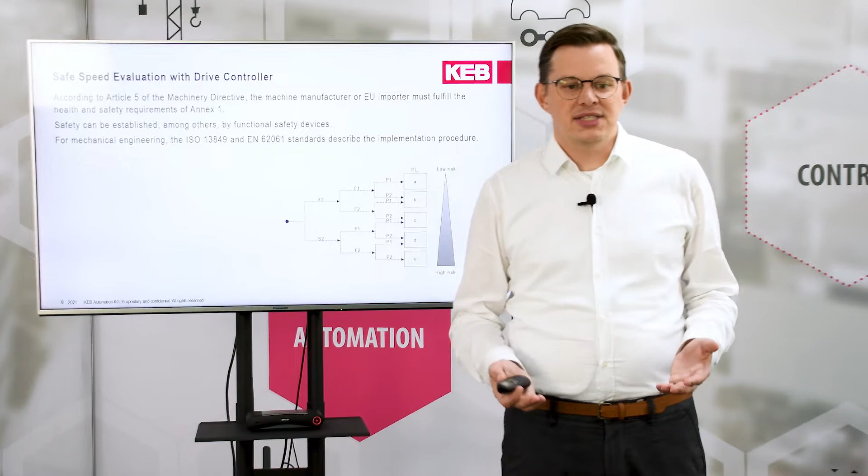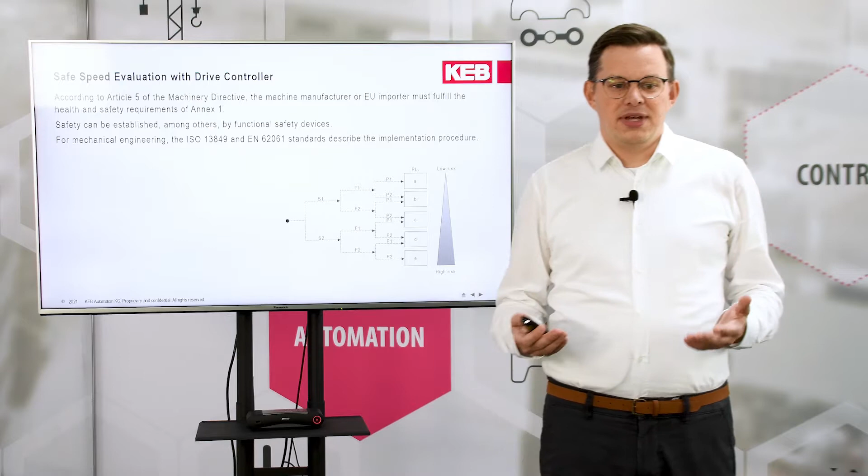First of all, I want to introduce you to why safe speed evaluation is so important to your machine. As you all know, according to Article 5 of the Machinery Directive, every machine manufacturer has to fulfill the health and safety requirements of this directive. And also, it's very important to integrate all the safety in an established way. And one of these established ways for sure is to use the internal safety functionalities, for example, of the KEB drive controllers.

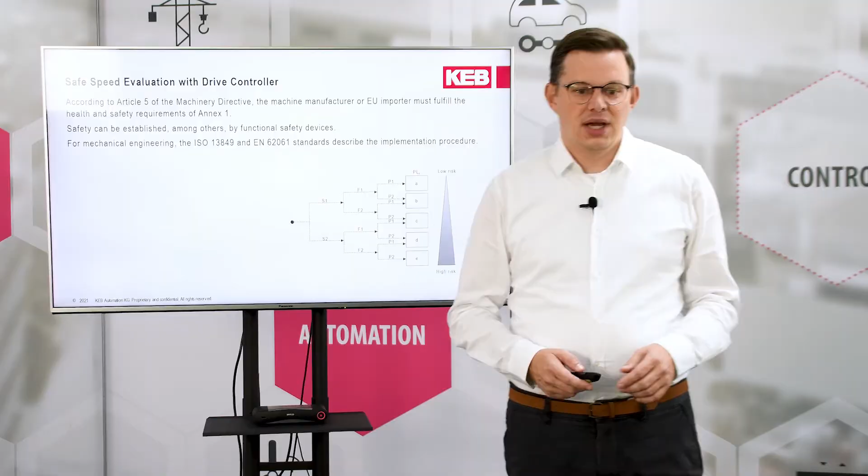Depending on your application, you have different modules in the machine regarding inverter, motors, additional input or output filters or chokes, and all these are different hardware positions according also to the IEC 61800-2. And if you want to fulfill the rules of safety inside of your machine, you actually need special hardware, for example, for speed or standstill monitoring. Also, this hardware means you have to wire some hardware. Sometimes you have to parameterize this special hardware by software and so on.

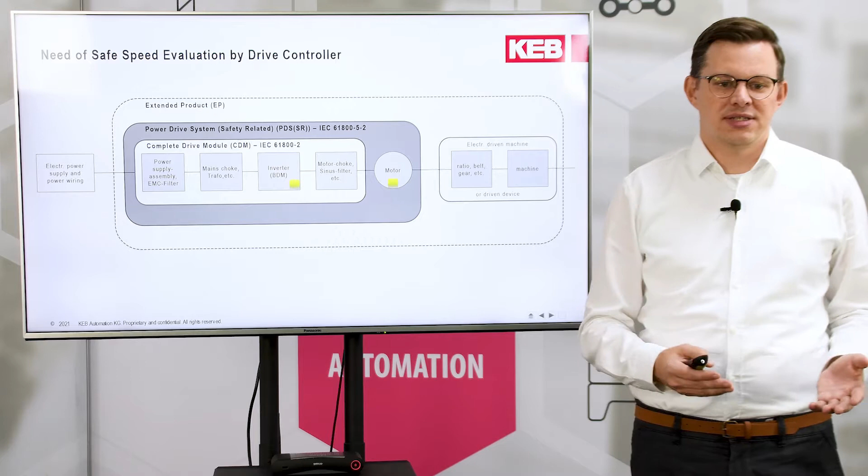If you want to bring down your costs, from our point of view, it's very sensible to integrate your components directly into the inverter or in the motor. This is, for example, a safety module that can be inside of an inverter, and also typically an encoder is used to detect the speed for speed or standstill monitoring directly in the machine. In a typical application you have an encoder just for the speed regulation or position regulation, and this means on the motor side there are mainly no changes to do to fulfill these rules, and just on the inverter side you need an inverter with a special safety certificate.

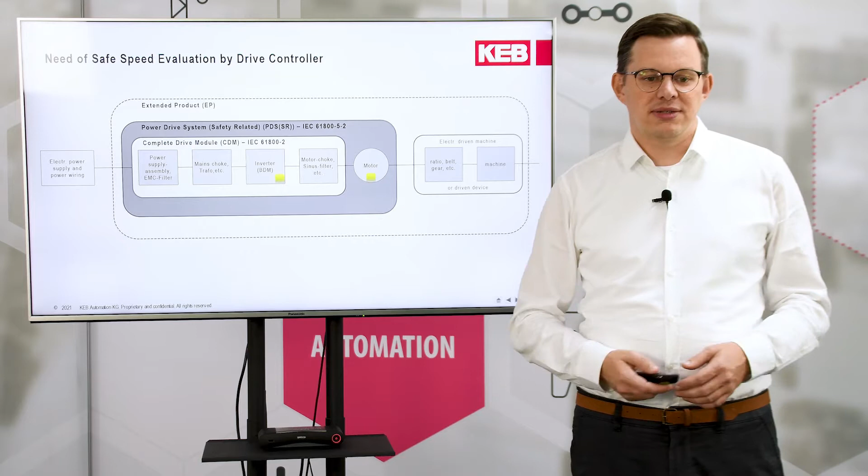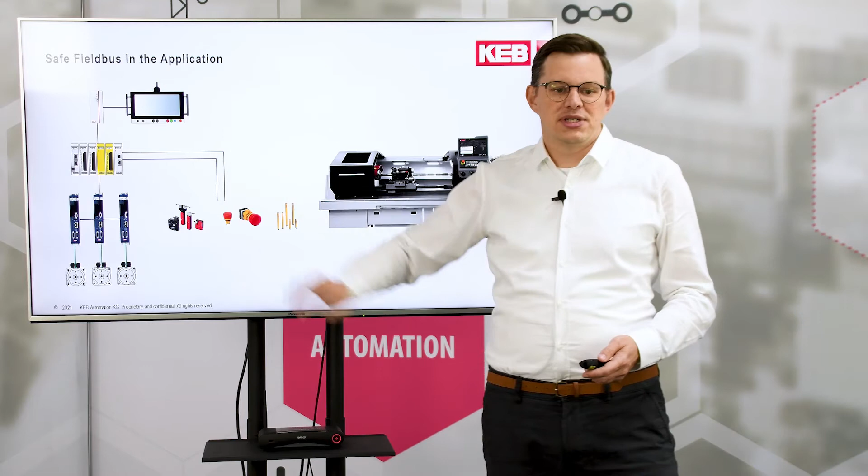Regarding safety, one of the big problems is the wiring in the application. Therefore, you can also use different solutions. For sure, you can directly mount everything in hardware, also the wiring, but this also means costs. In modern applications, you can also use the field bus, which is typically directly in your machine, so that you can use, for example, the EtherCAT bus plus FSoE, the safety over EtherCAT field bus, or in your Profinet applications, for example, the PROFIsafe field bus, to fulfill the safety rules and also to control the machine directly by field bus. The only thing you have to do is to add a safety PLC inside of your application with a module that can handle the safe field bus by itself. And this means that you can reduce the costs of the wiring because the field bus is already in your application.

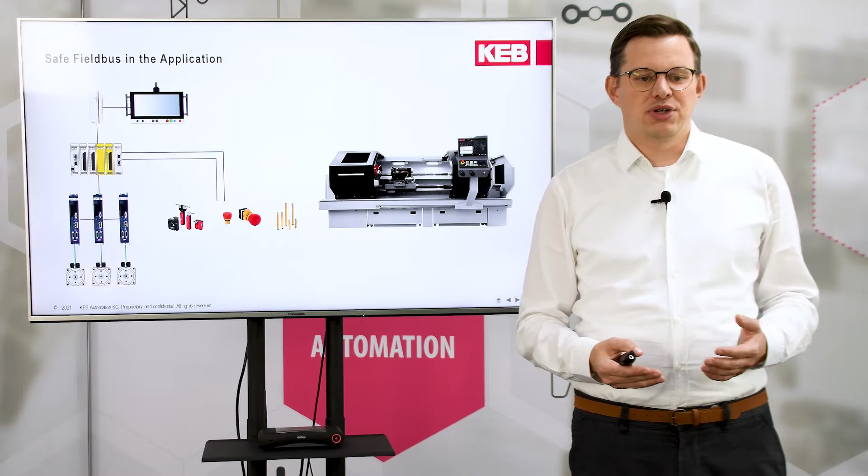If we have a look at the different technologies of speed evaluation, we have mainly three different types of evaluation. Very typical, for example, is analog speed monitoring, which means you have, for example, a sine-cosine encoder or a resolver in your application, which is typically known in the market. Also, if you have other encoders like digital ones, you can also use digital speed monitoring like Hiperface Safety or others, which means you have, in addition to the analog information, additional safety information, and you can also use this connection by safe field bus connection to get additional information.

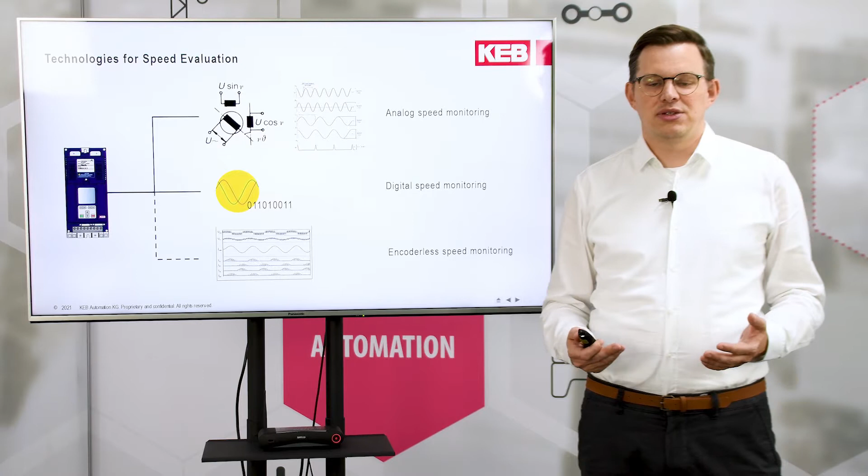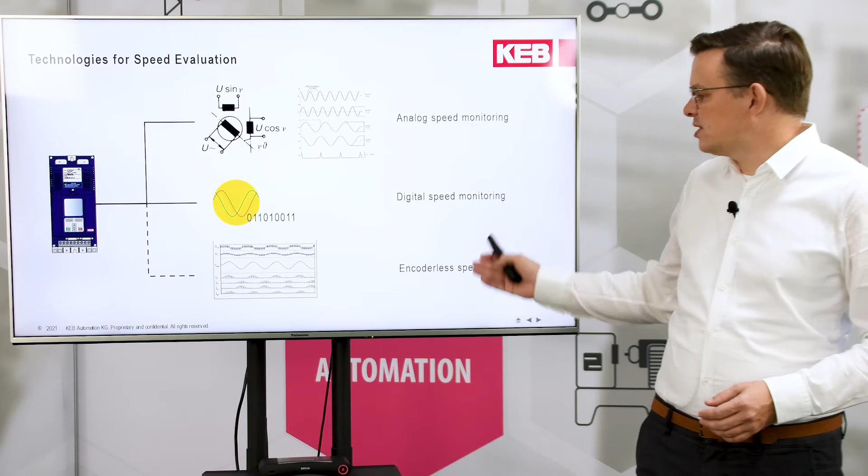And the third one, which we want to present to you today, is the encoderless speed monitoring, which means that you can use speed monitoring together with a KEB drive controller, but there's no need of any kind of resolver or encoder in your application anymore. And this means if the application does not need an encoder, there's also no need to use an encoder just to have safe speed evaluation. This is one of the big benefits here from KEB that we want to show you today.

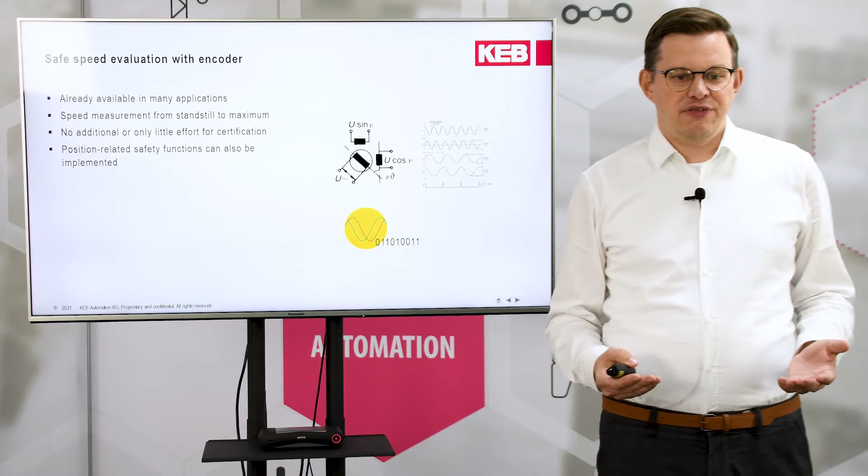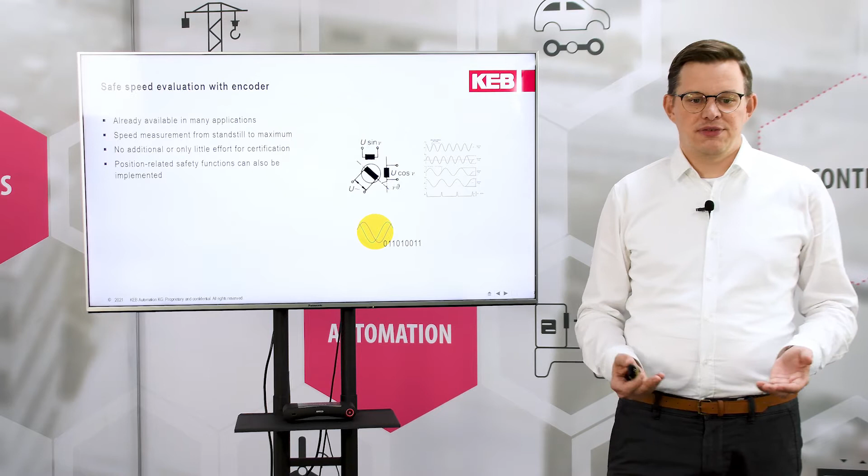Just to bring it here in front of you, I just added the typical main facts for safe speed evaluation with encoder. Like I said before, in many applications we still have an encoder, so it's just a question of certifying this application together with the encoder. Also, one of the big benefits is if you use an encoder, for sure you can also start from standstill to the maximum. Here are some limits for encoderless safety.

And there's typically no or just a little effort in certification if you have already an encoder in your application. Typically, the manufacturers of the motors can give you, for example, a certificate for the motor encoder combination, so that there is very limited effort in a startup of the machine or of the application to certify it.

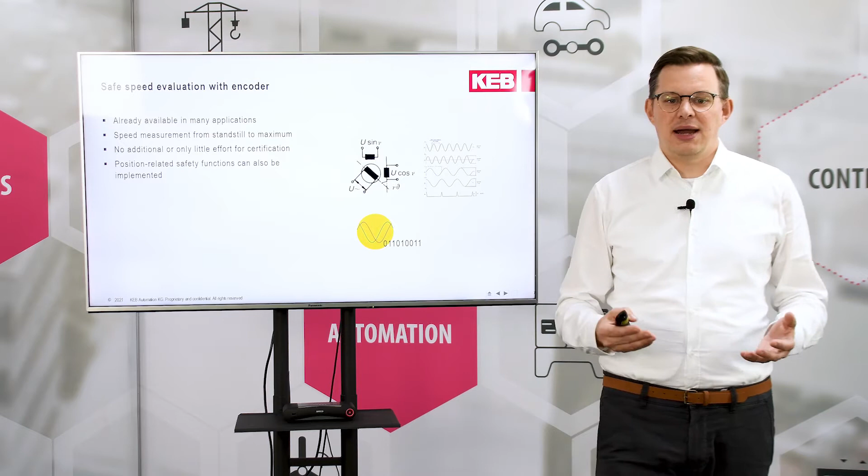Also, if you want to have position-related safety functionalities, you always have to use an encoder, because otherwise there is no clear information about the actual position, and so there is no other possibility up to now to handle this. Without an encoder, like I also said before, there's no need to use an encoder, which means less cost in the motor-encoder combination. For sure, you also need no encoder interface in your drive controller, which also means that you can reduce the costs of the inverter.

Also, if you have all this information directly in the inverter, the response times to figure out if there is a safety-related fault are much faster than the feedback from the encoder due to the less round trip time. Also, it's possible to evaluate high-speed applications using safe speed but without an encoder. And all this can also be certified up to SIL 2, which is a performance level D.

For sure, there are a lot of pros, but there are also two cons. Like I told you on the first slide, you cannot directly start at standstill, which means safe operating stop is not possible together with encoderless safety. And also encoderless safety is not possible in operations where you have regenerative operations. So in this field, the possibilities to calculate the speed are not given internally, and so these applications are also not possible.

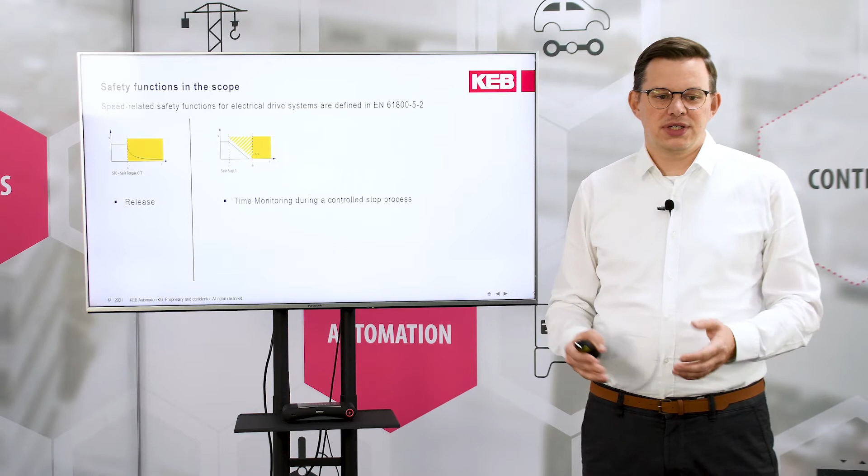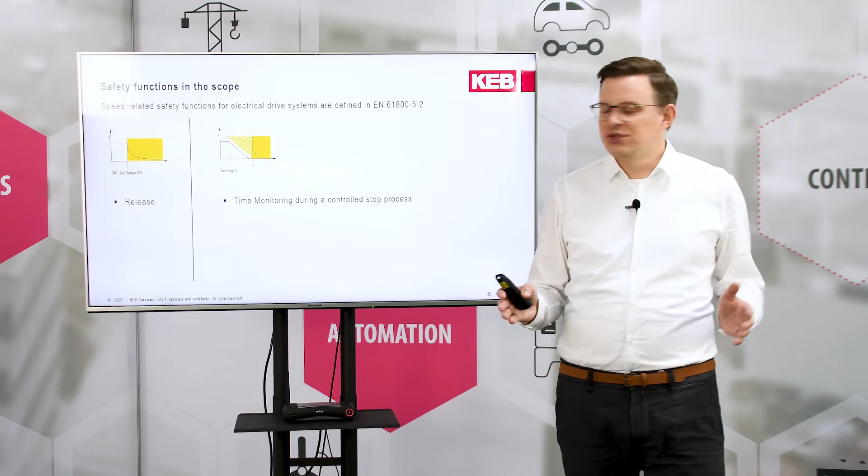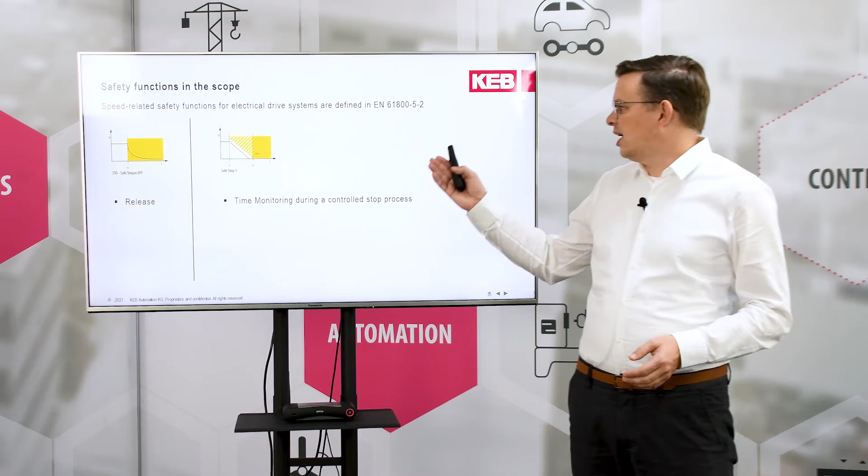So if we have a look on the safety functionalities here, for sure the first one we are always talking about is the safe torque off, STO, functionality, which is more or less the release function for the inverter to give torque to the motor shaft or not. And also combined with this, the SS1, which means safe stop 1, which is more or less a time monitoring during a controlled stop process. The inverter is lowering from the actual speed to 0, and after a time the STO will be given. And this is if you have a safety fault.

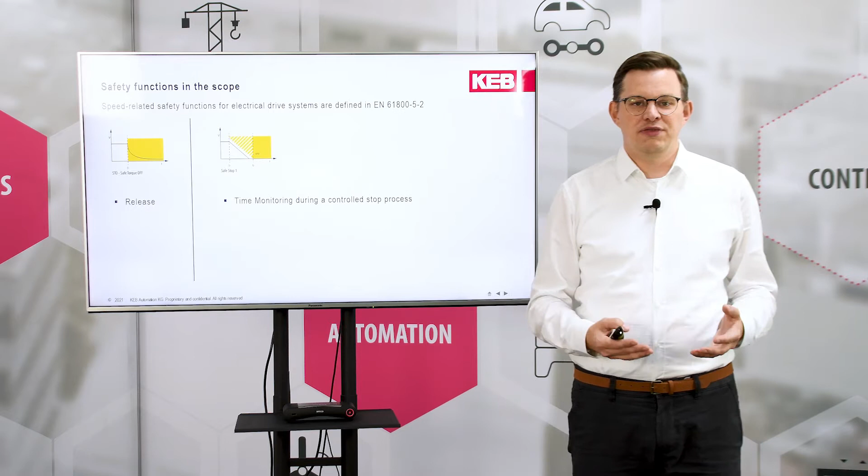The SS1 functionality is, besides the STO, the only safety function you can parameterize as a reaction to a safety fault. Otherwise, it's always STO. If we have a look on the safety-related functions, you can also see always on is the safe maximum speed. You can, for example, monitor maximum machine speed that you don't have to switch on or off. You always want to limit the application to, let's say, 220 RPM. So this is a functionality where you can give the 220 RPM directly to your application and there is no need to switch it on.

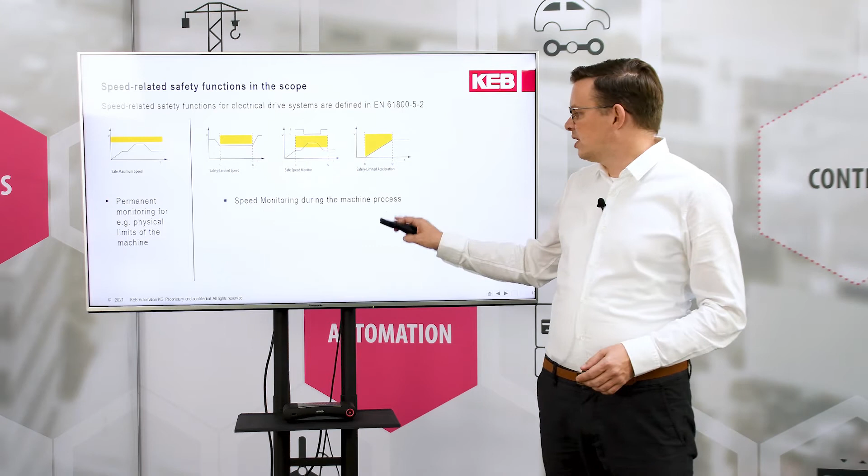Also, the other safety functions like SLS, safe limited speed, safe speed monitoring, or safely limited acceleration are also directly in the inverter and can be parameterized by our tools. So speed monitoring can be used during the machine process, not at standstill. If you want to start up an inverter, you can do this directly with the very well-known COMBIVIS 6 software from KEB, which is the software for the parameterization of the standard inverters and can also directly be used in this free version for the safety-related functionalities.

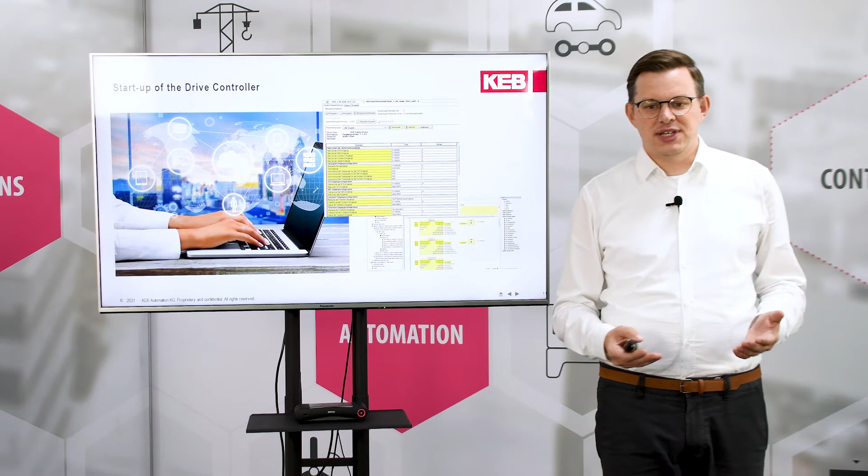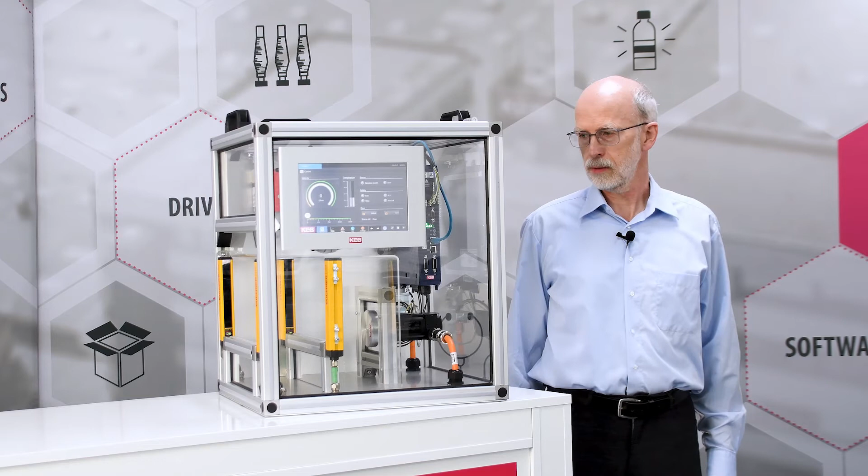And to give you an introduction of what is possible with this, we have here Bernd today to show us on our model some functionalities of the wide range of safe speed evaluation without an encoder. So welcome, Bernd. Yeah, welcome. My name is Bernd Tünnermann and I'm in the training department responsible for trainings in safety. I will show you how the drive functions with our demonstrator here.

This demonstrator consists of a COMBIVERT S6 Pro with a safety module 5. We have a synchronous motor without an encoder, and we have 2 light bars which directly switch safety functions. And we have a display here to manage some movement. So when we start, we can set a speed.

So start. The inverter runs, and with the first light bar, which we have directly connected to the input of the drive, we have safely limited speed, and with the second light bar we have safe torque off, the STO, so that the motor stands still.

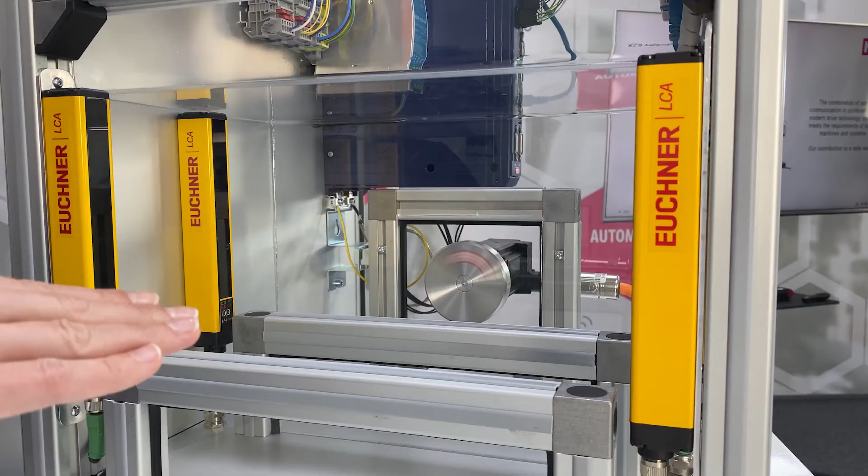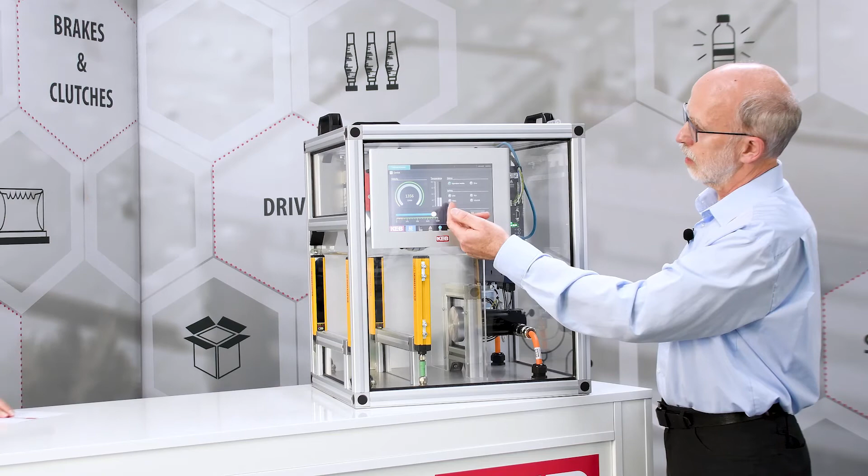Now we need a little help, so please activate the first light bar, and you see here that we are in status safely limited speed. 150 RPM is limited, and when you put your hand a little deeper, then you go to STO and the motor stands still. So when you put your hand out, you see we are going from disabling STO to disabling SLS, and the motor starts again.

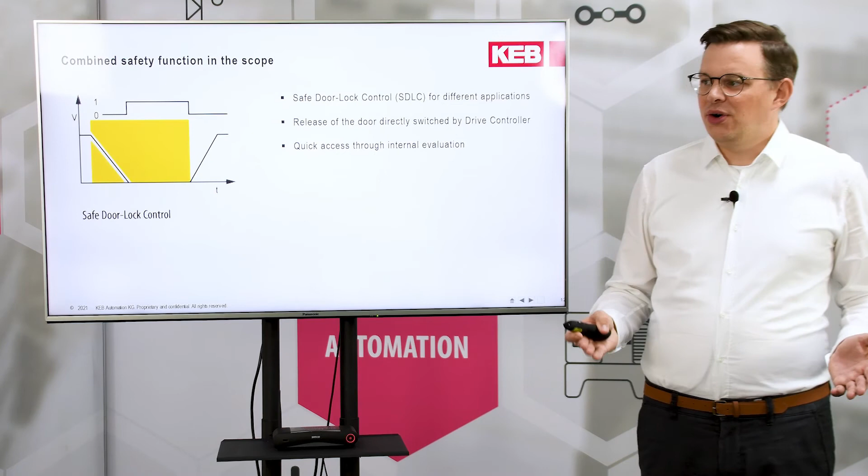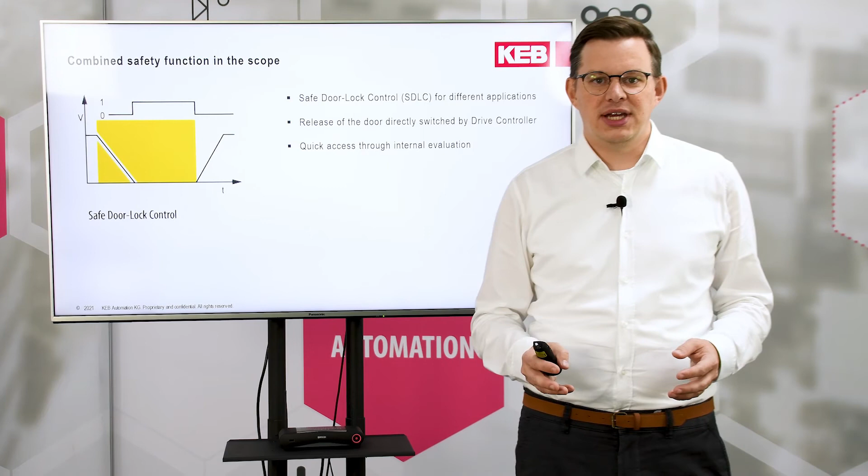So like you see, all these functions are implemented with a motor without encoder feedback. So we use our internal motor models to run the motor very exactly, and we can also very exactly identify that we are at the right speed and that we do not exceed the maximum limits of the parameterized safety functionalities.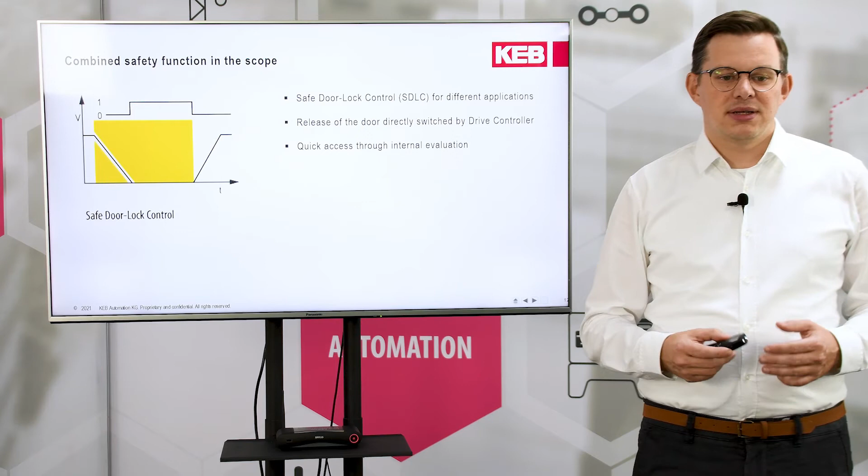But regarding all these speed functions you saw before, there are also applications where you have the need of combining functionalities. At KEB, we have the possibility to combine up to 8 different safety sets directly in the drive controller. But besides that, there is also the need, for example, to directly control a door to get into your application, like on woodworking machinery or something else.

So we from KEB decided to implement a functionality that is not directly coming from these safety-related functions. We called this new KEB function Safe Door Lock Control for different applications in use. And this is something where we have the shown SS1, safe speed, acceleration functionalities and so on combined into one new KEB safety function with which you can directly control your door.

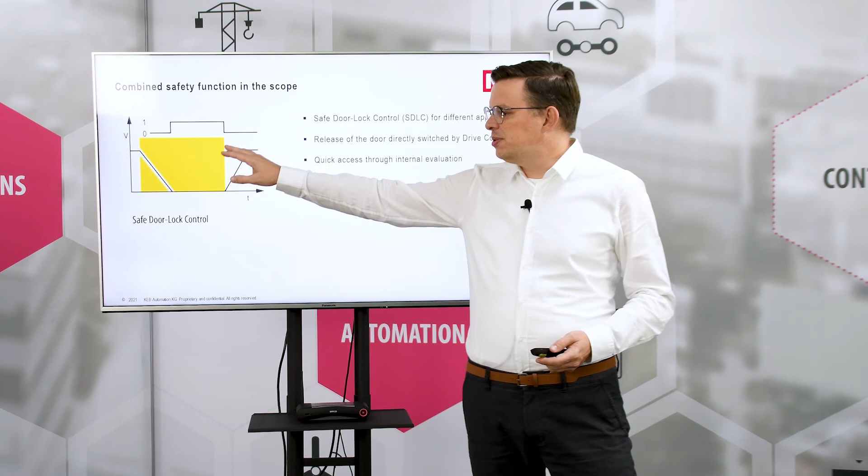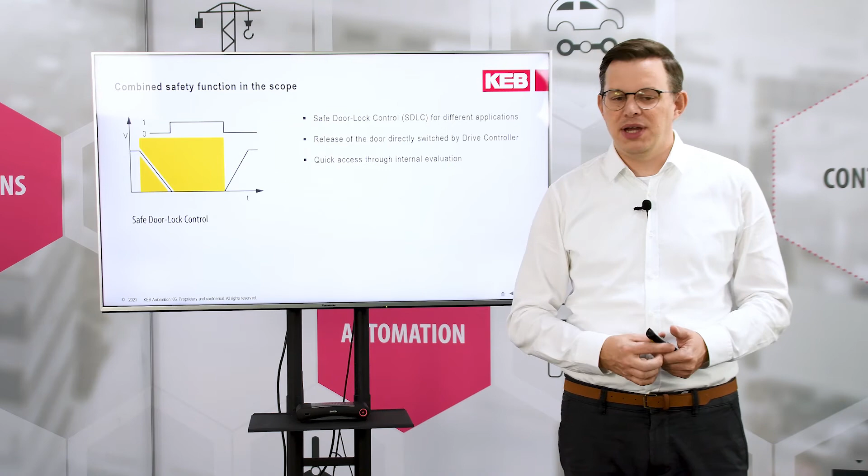And here as a scheme you see what happens. We have a typical speed, and if you activate this functionality, you will lower your speed in a controlled way without encoder to 0. And the KEB drive can detect this and will also detect that you are within the maximum and minimum deceleration. And if you are at 0 Hertz, you can give a safe output to directly control, for example, your door and release it to open your application only if the machine has stopped in a safe way. And this is also something Bernd will show us now here at the demonstrator.

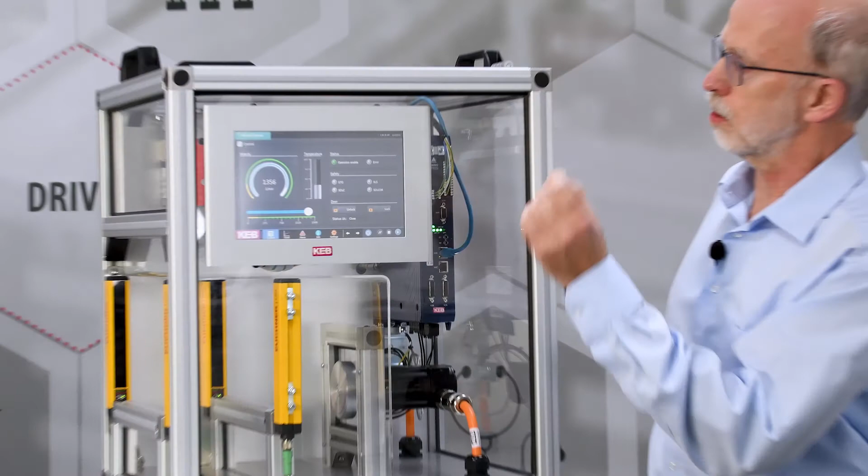Yeah, okay. So at our demonstrator box, we have a door here, which is on top, and now it's closed. And for example, we start the machine again. And now when we want to open the door, we can put the speed down to 0, stand still, and then we have here an activator for the SDLC function. So that means we go into function SDLC, and then the output is activated and opens the door release switch. So we can open it here.

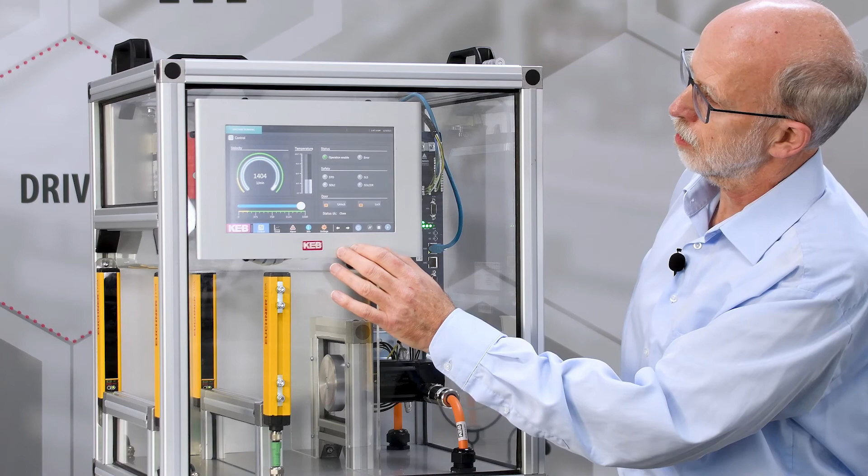And now the drive is also in status STO, so it cannot start. And when we close the door, then we lock again, and then we can start again. So we raise the speed again. The other possibility is that we directly engage the door release. So the drive is decelerating and opens the door release switch, so that we can open the door without engaging a separate controller. And we can start again, and the machine is running again.

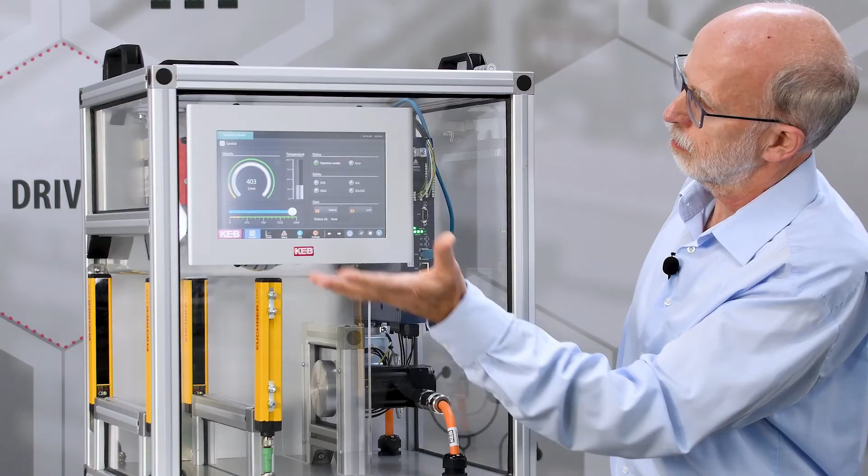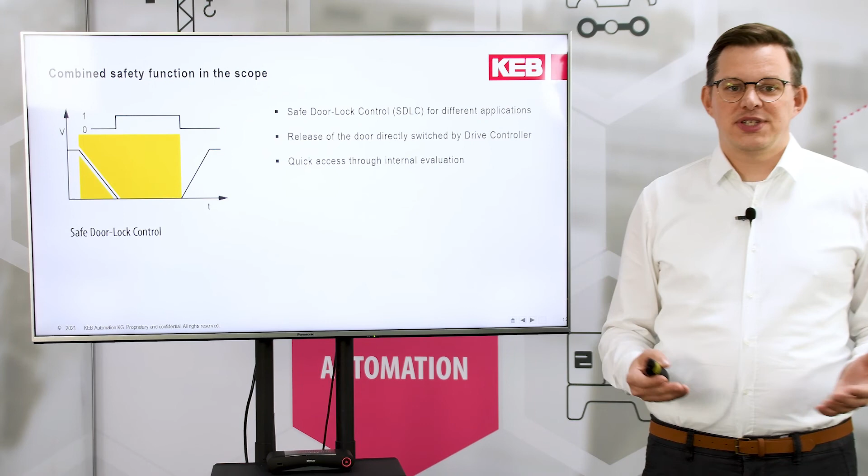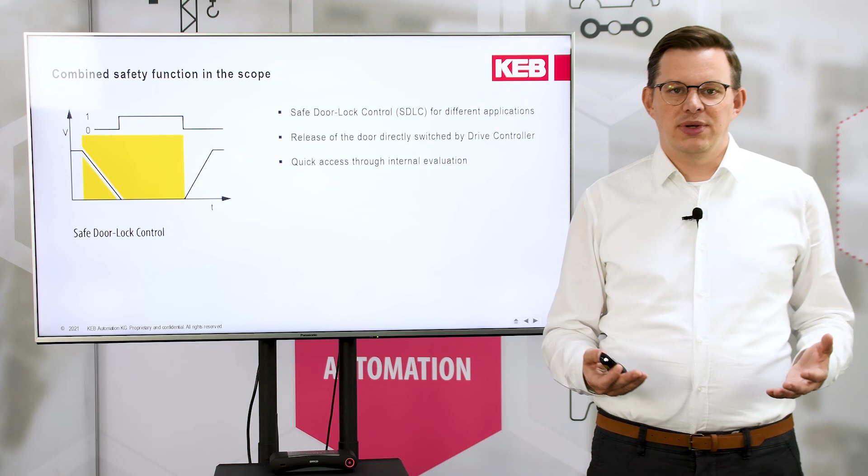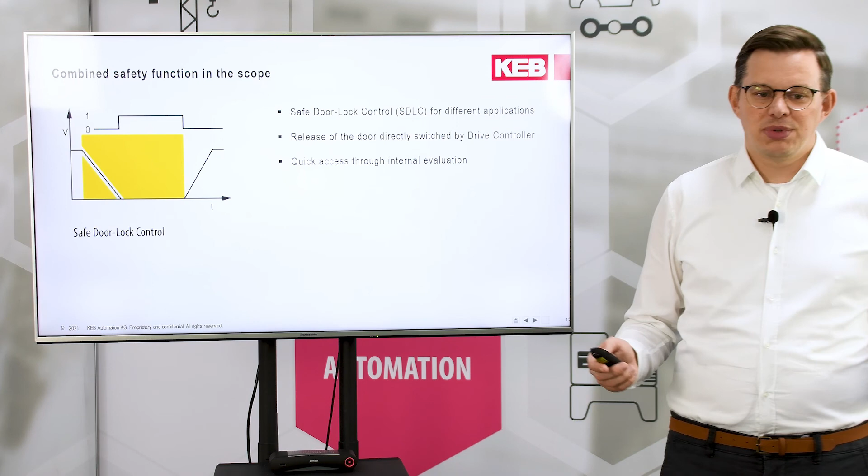So you see, with a combination of safe and unsafe functionalities, like starting and stopping in an unsafe way and controlling this in a safe way, you can combine the needs of your application with the KEB drive controller, reduce the wiring, reduce the installation costs, also the parameterization of your application, and get new possibilities in your machine. And this is what we wanted to show you today from KEB in the Tech Tuesday, with our experience of more than 20 years of safe evaluation in the VFDs, in the drive controller.